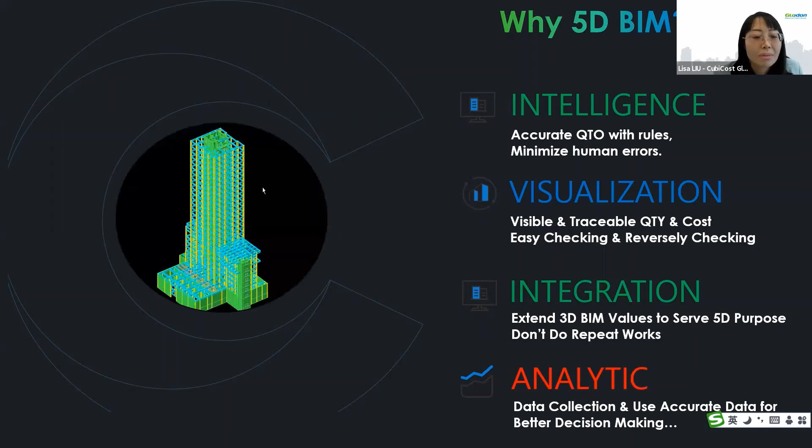Okay, as we move forward, every one of us has been affected by COVID. In fact, Singapore isn't getting better, we are really hoping things will improve.

Eventually, Singapore is going to stay resilient because COVID has affected every industry.

I have these slides showing you all a new definition, or maybe it shouldn't be called new, by Mr. Eugene Shah. His team, and some team with Sembawang Jurong, is also using CubiCost. He shared about construction overcoming virus through digital solutions.

Back 3 years ago, in March 2019, he also shared his point of view at our live event - that was really before COVID.

Well, for myself, I actually understood, or I feel so much that we are lacking connections, human connections with many of you - clients, partners. We can't see each other, and sometimes communication gets tougher.

Well, we're having a very short topic of the Ds. I believe many of you have seen this over the internet, if you use LinkedIn. So from 3D to 5D, that's what we're mentioning today. I will just highlight the 5D sector.

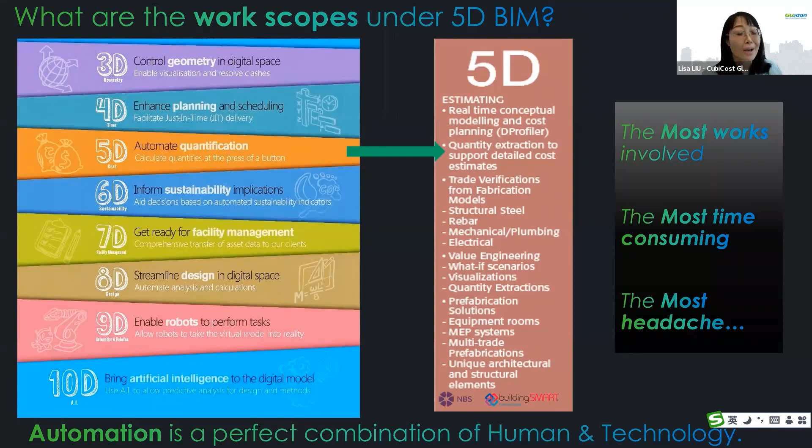I can't read all of them, and I was like, oh, being a QS is really not easy. Just this morning, I listened to one of the books mentioning automation, which inspired me on the definition of automated works. People might think there's a software, a tool, a solution where I throw my drawing inside and get everything out. In the real world, that's not possible. So what automation is, is a perfect combination of human and technology and tools. Our hands will be using the tools, and how best we use the tool makes the difference between us and a traditional QS who must still stay in the old school way.

I did also extract a sample contract requirement of LTA's on 5D. I highlighted some in red boxes. You can see you have to do the extraction of quantity for progress claims, and it has to be accurate with an efficient progress claim process. LTA also requires BIM training, and which solution or software they use, they normally leave that for the main contractor to decide. So I did also summarize the contract requirements.

Number one is accurate representation and cost model. With Revit importing and direct integration into CubiCost with SMM2, you can achieve that.

And number three, as for BIM training and hands-on support, we have very detailed online basic training. We also have hand-holding support, whether face-to-face or online, which is very easy nowadays.

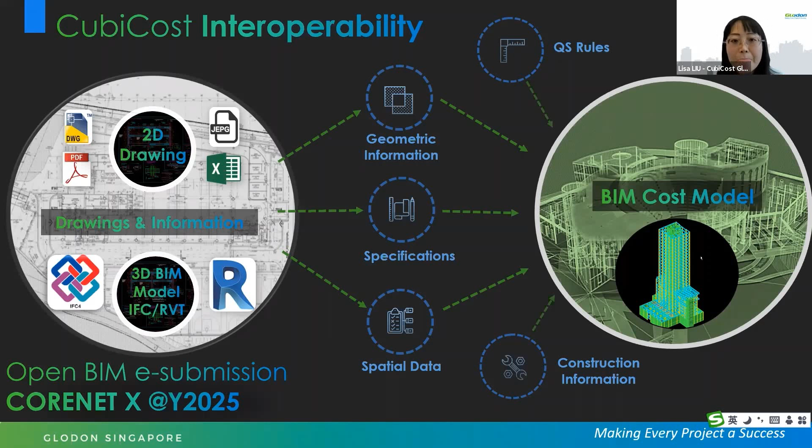There's an open BIM submission by IFC. CubiCost is also taking care of that. The built-in calculation rules are actually having so many options in CubiCost.

If we come into Singapore, we are talking about SMM2 and CP97, and we have Eurocodes in the rebar. We have Continental Steelbook for steel structuring dimensions and data built into the software. If we actually have the TAS to install, you will come into this window to choose the calculation rules you want to install.

So for Singapore, we go for CP97 and SMM2. For Malaysia, Indonesia, Australia, and many other places, we also have the rules written into the CubiCost system.

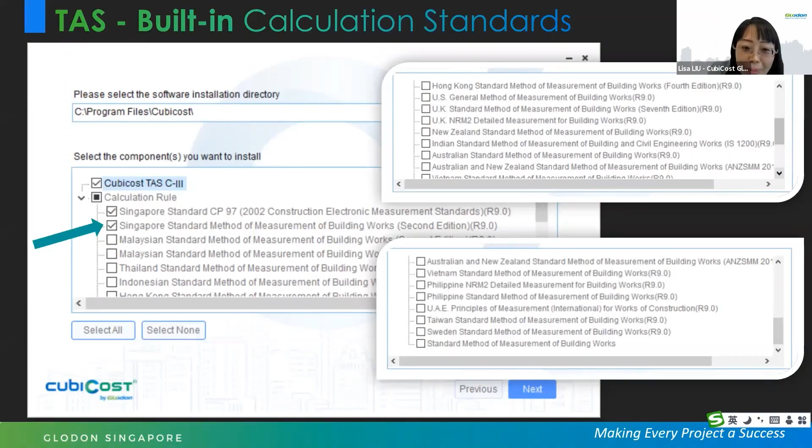So with that, later on, you will be able to see a TAS overview. You can get concrete quantity, concrete volume. Formwork is actually separated into overheight, side formwork, and bottom formwork. You'll be getting detailed finishes quantity.

That normally occupies 40% of the project cost. You will be able to come up with a rebar ratio by having your own technique study data. Of course, for CubiCost, we do not give any data for you to use. You guys are going to take that accuracy responsibility.

With SMM2 and CP97 for Singapore purpose, you will be able to see auto deductions. You will be able to enjoy a visualization check-in of 3D deductions and also calculation formulas. At the right side, I have some main items to share with you guys.

For Singapore, we do have a sector called precast, and we are able to do PPVC, just like Lego. We group, combine, copy and paste in CubiCost during tender stage. Of course, at project stage, again, we are talking about using a Revit model. And as for steel structure, we are able to do that.

That's actually the recent updates of CubiCost TAS 2021 version. As for finishes, we actually use a room concept.

Room concept, as we are talking about finishes, a recent finding with some projects we are supporting is: if the modeling team has modeled all the finishes in Revit, of course CubiCost will be able to read it. However, many of them do not model into that detail.

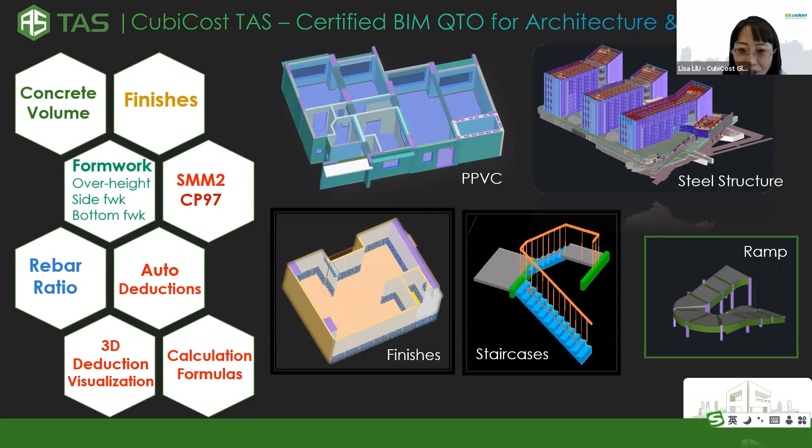Next, I will share with you all an overall understanding of rebar in the quantity takeoff. Again, I would use the example of Singapore. We used to have BS codes, and now we have Eurocodes - actually in 2015 there was a compulsory transform from BS to Eurocodes.

So in Eurocodes, we're talking about bond condition, good bond, poor bond. And for rebar, we set up tension, compression, anchorage, and lapping. All these, we have a table in TRB that you can look into. Every project, go according to general notes to set up precisely.

You are also able to calculate additional bar, trimmer bar, and use construction joints to come up with certain quantity that is partially done, and you enjoy auto deductions. There is a reference BBS that you guys can refer to.

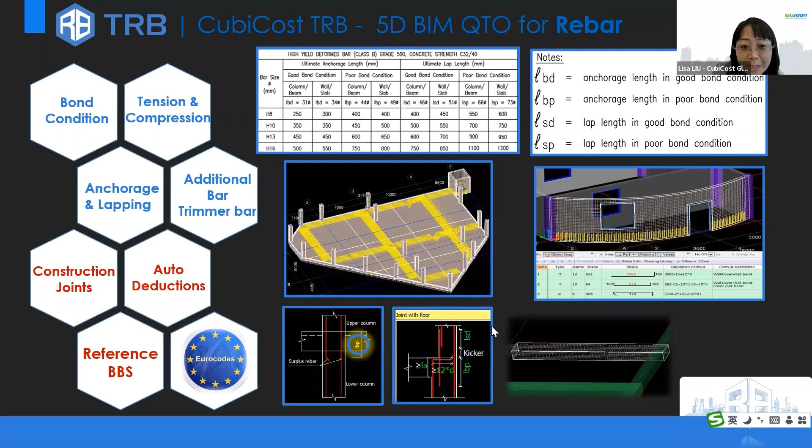However, in the real construction stage, the detailers and subcontractors doing the rebar will be different, to consider site installation situation. So that's about a general understanding about TRB.

For CubiCost itself, since these two solutions both have a structure, in fact we can actually communicate - you don't need to do double work. Let's see, we have the rebar structure model done with rebar detail quantity.

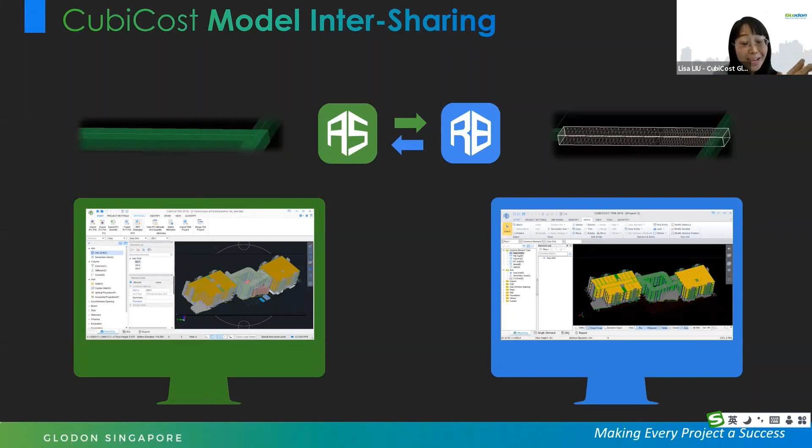We can actually bring it into TAS to generate concrete volume and all formwork automatically. Of course, if you proceed to do finishes, you will be getting the quantities of finishes. If we are talking about a project flow, you will actually flow a different way. I will share later.

When we have quantity from TAS and TRB, so we have all the building quantities, how are we going to manage the data? I believe many companies, Glodon included, a few years back our data was just Excel sheets, but when we want to see updated versions, how can we get it sorted and arranged and make use of it?

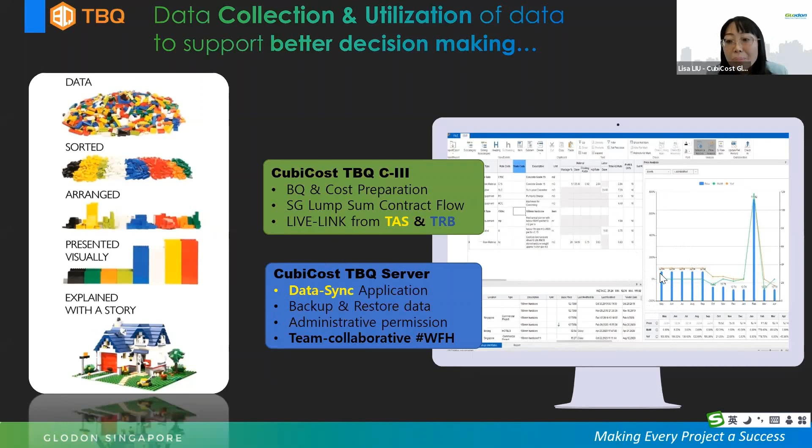Nowadays you might be able to use data to explain an interesting story. In TBQ, you can achieve that while linking the quantities done from TAS and TRB, and you'll even be able to see some chart and graph for cost analysis.

There are times, actually just yesterday somebody called me—I shared about this webinar. He's a BIM manager from a consulting role. He mentioned that normally the Revit model isn't ready for some projects' building sites, so can you still achieve 5D? We, CubiCost, are actually able to use drawings of 2D.

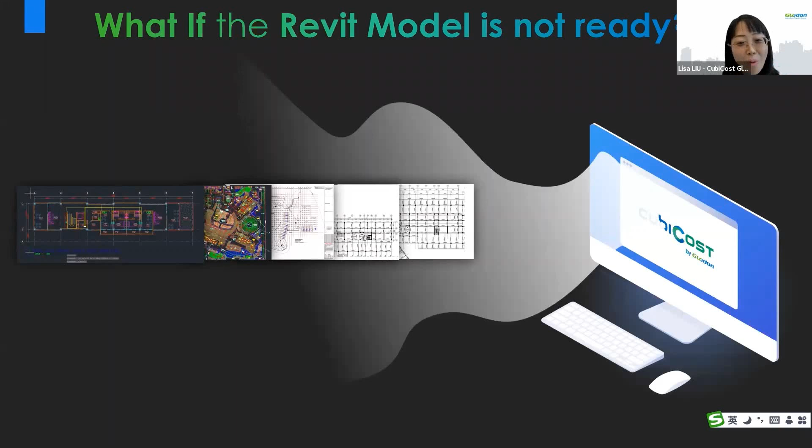You will have black and white drawings, maybe AutoCAD construction drawings. All of these can actually go into CubiCost TAS, and you'll be able to build up a 3D model like this. So how are we going to do that? Basically, just pick the line and convert it into entities, cost entities.

For that I may not be able to share a technical demo today. If you guys want to find out more, you can share with me later, and we can share some demo material or give you a live demo online, or simply a face-to-face meeting.

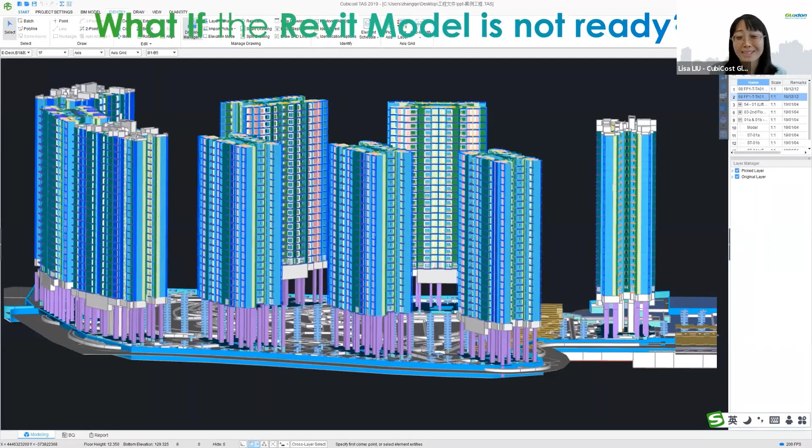So now we come into the topic of 5D BIM workflow. How does it run in CubiCost? Just give me a little while.

Okay, I just had a little bit of coffee and water, so now we start the important part of the 5D BIM workflow.

With this slide, you can understand we have proposed this workflow to certain organizations, main contractors, according to contract requirements. From the left side, we have the Revit model, whether MRT stations or building projects, it has to be Revit. We import the Revit model into TAS and proceed to TRB, getting rebar quantity. Of course QS need to do the work—you won't get 100% automatic, to be very honest with you all.

So from all the quantity linked to TBQ, we will be able to have the data to calculate work done percentage. I understand from LTA projects, maybe Jurong Region Line, QS will...

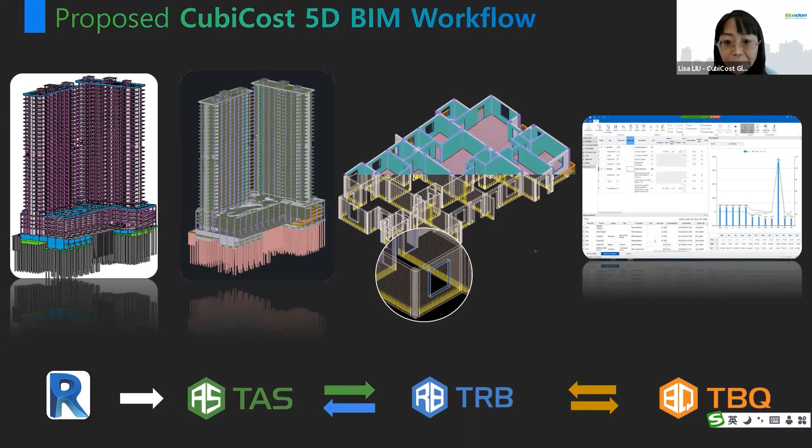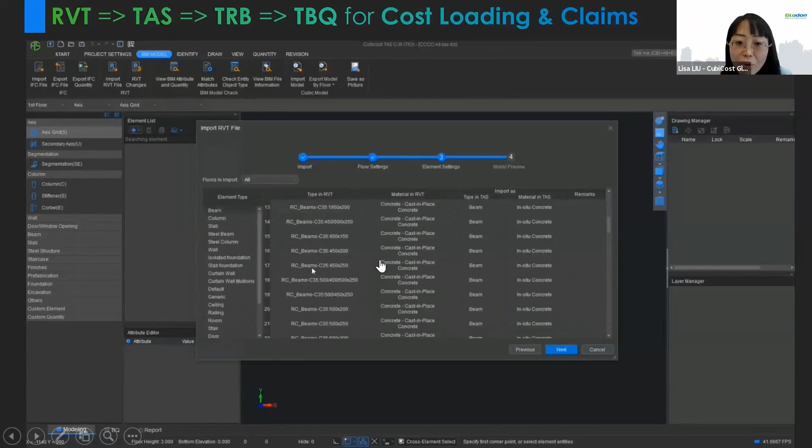I do have a video over here. It might be slightly long, but I still wish to run it to share with you all the main steps. Inside the TAS interface, we take the model and import it. We just need to give a reference floor—normally we use level 1, or for MRT stations the entrance level. We just match the attributes simply by three steps, and we import everything in.

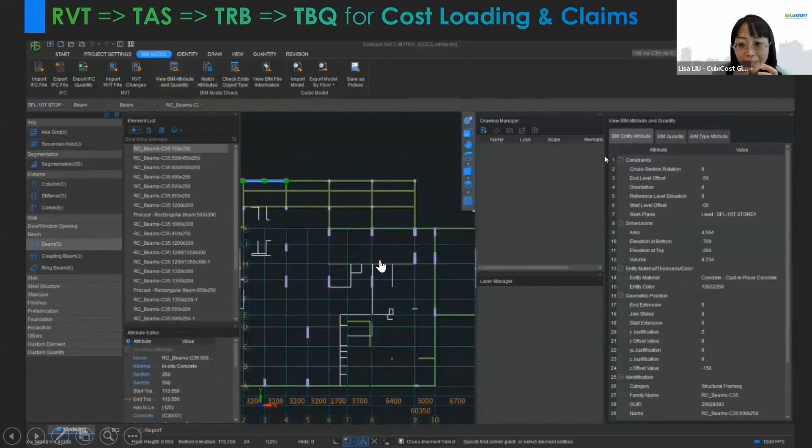With that process, if you proceed to calculate, you'll get the quantity of concrete, volume of formwork, as well as finishes quantities inside TAS. But again, what about rebar quantities? I've heard from projects that governmental projects now allow main contractors to claim rebar fluctuation costs, so you have to have very detailed quantity calculated and able to present.

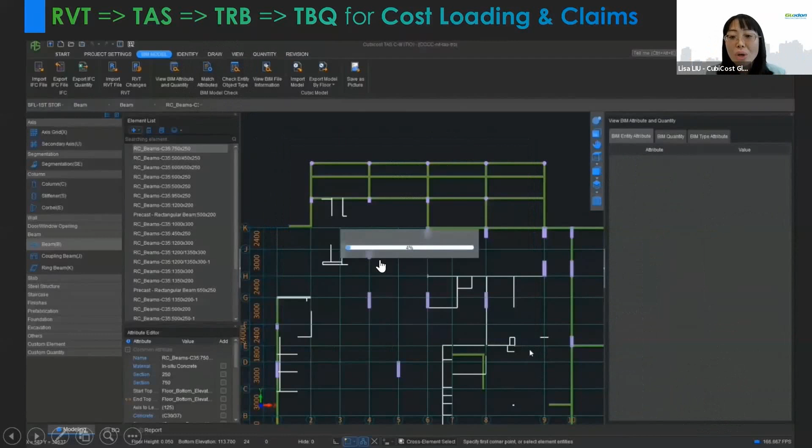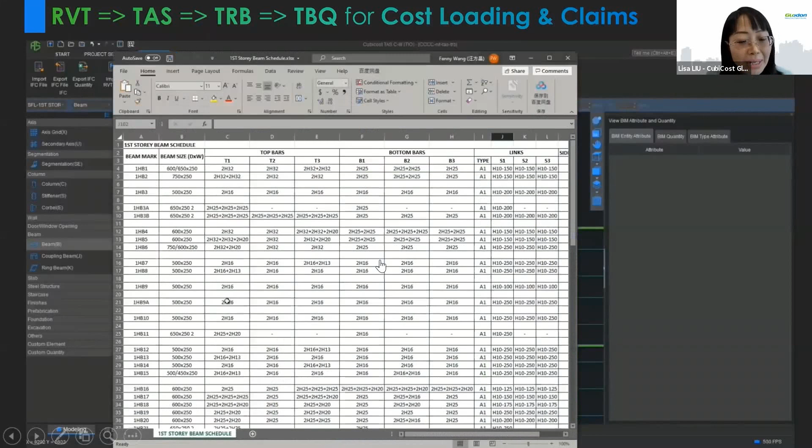Over here we are using a Revit-produced beam schedule as an example. We match the attribute by using the beam marking name. You can see if we did the sorting, the beam marking name and the element list will be the same. So what do we do next?

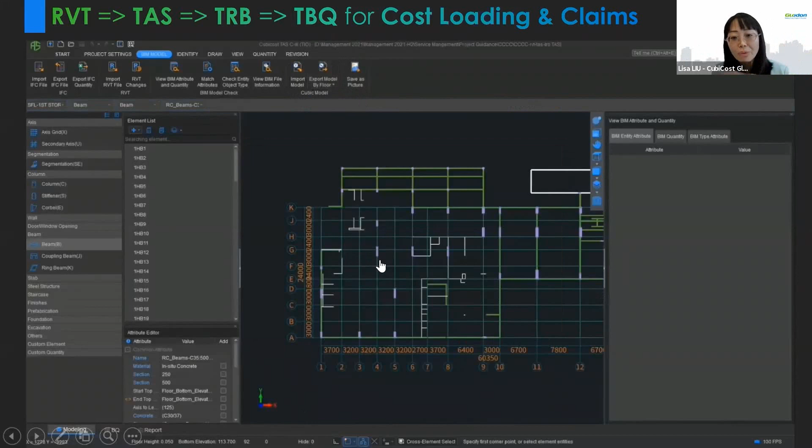We will be exporting this model as a CubiCost file. We only export this level 1 for testing purposes. Then we are going to import it into TRB so that the reuse of model QS does not need to do repeat work. So now we come to the white interface with the blue logo, TRB. We import that model, but this time we don't import Revit.

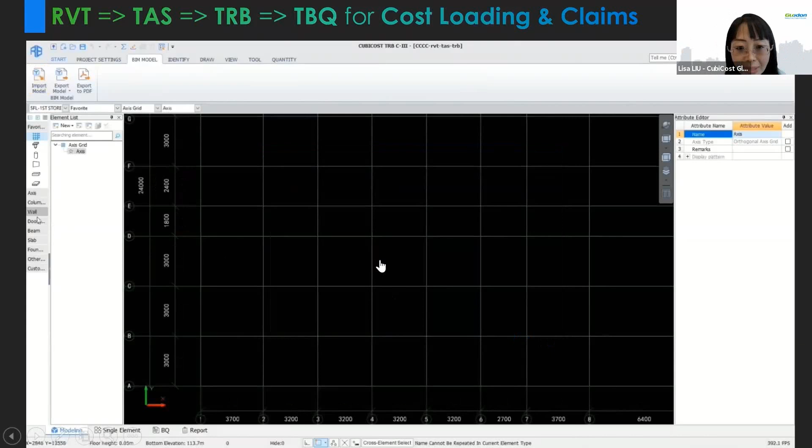And then we will be able to have the model in place. What are we going to do? We bring the general notes with the rebar details and with the beam schedules, and we're going to do something. Let me hold and let you guys see.

So if we proceed to just see one of the beam, do you get rebar quantity? You don't, because we didn't key in the data. But we also don't want to let QS do so many manual keying works. That's really tedious, and in many situations you guys don't have the quiet time like us.

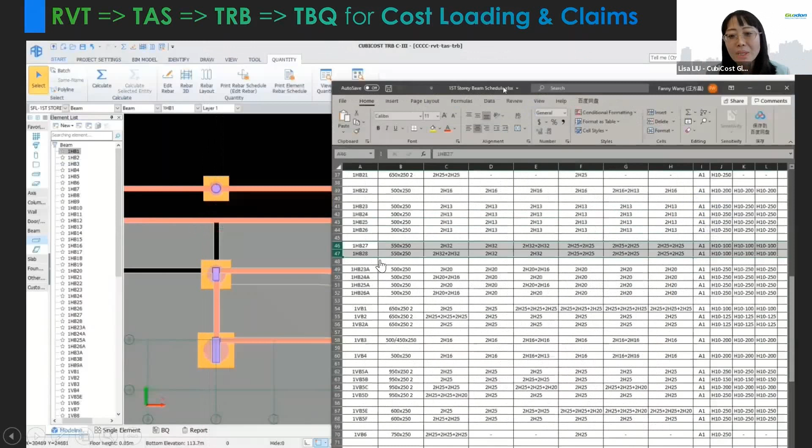We are looking in a small meeting room today, so we will be reusing the beam schedule. We take example 1HB27, 1HB28. We're going to do importing of Revit-produced beam schedule. You can see the format is actually Excel.

Of course, at this stage, you are able to bring in a PDF. I'm just adding on, since later on maybe somebody will have a question. That is the part where humans need to work together with machines or technology tools.

You've got to do nominating. You've got to tell the software what this column of data is, so that the software is able to synchronize and match it. That is the thing that QS needs to do.

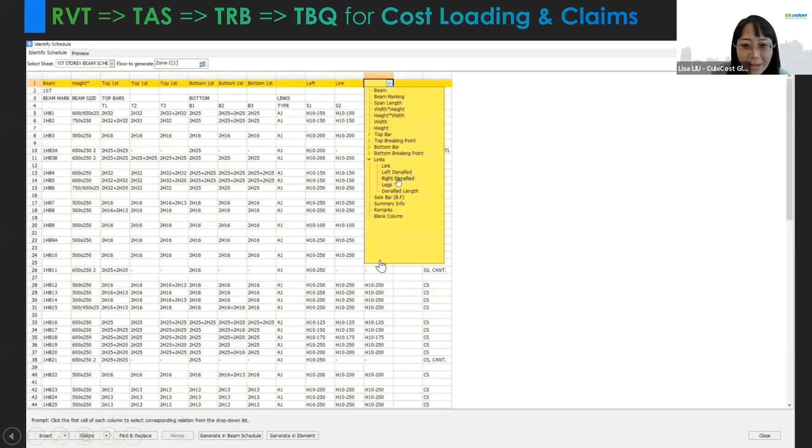Is that difficult to do? I don't think so. Just take the table side by side and do maybe one minute of quiet work, putting away your phone and switching to silent mode, and then you get the nomination of data done for the beam schedule over here.

If you do a checking, you can see the list: continuous beam, single beam. It is exactly the same. Important button: we will be syncing beam information.

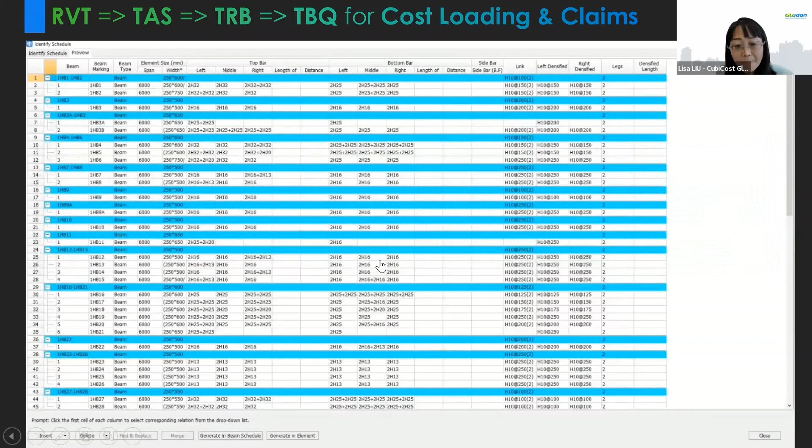Into the entity. So in CubiCost, the entity is called the cost model, so a model with quantity data for QS. After we sync successfully, we actually come back to see the rebar again.

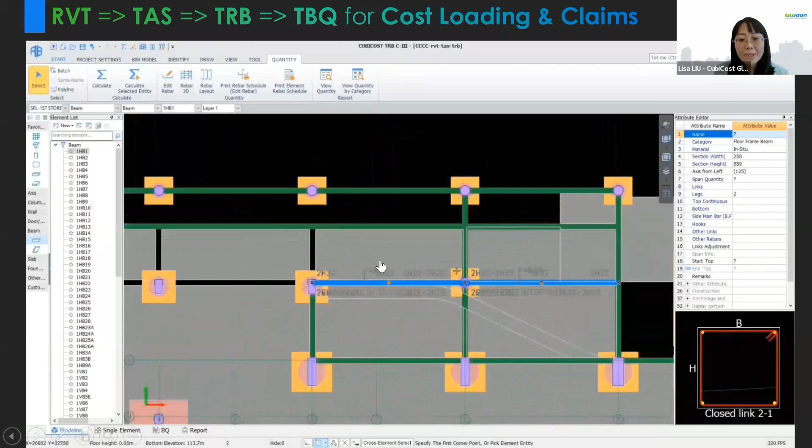Now we do a calculation. I think you guys already see some of the data indicated over there. Let's view the rebar in 3D. So you already see some of the rebar 3D inside the column, inside the beam, and you might be asking, is that actually a continuous beam?

So in TRB we can just do some simple merging. Now, recalculate. You'll be getting the rebar quantity with a 3D view, with lapping to connect two of the beams.

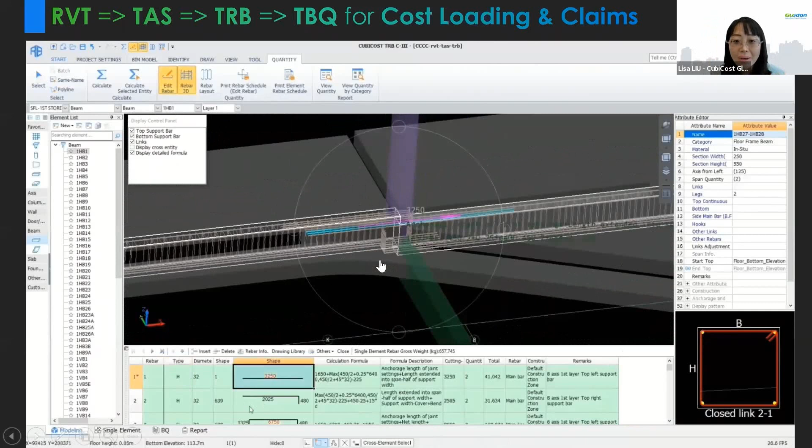Well, if you talk about vertical elements like columns, it will be a similar way. Walls will also be a similar way as well.

I can see that our time comes to 3:30. I actually have a slightly longer video over here, so let me jump a little bit ahead to share with you all a flow by using just one slide. When I share the videos with you all later, I will share the full version.

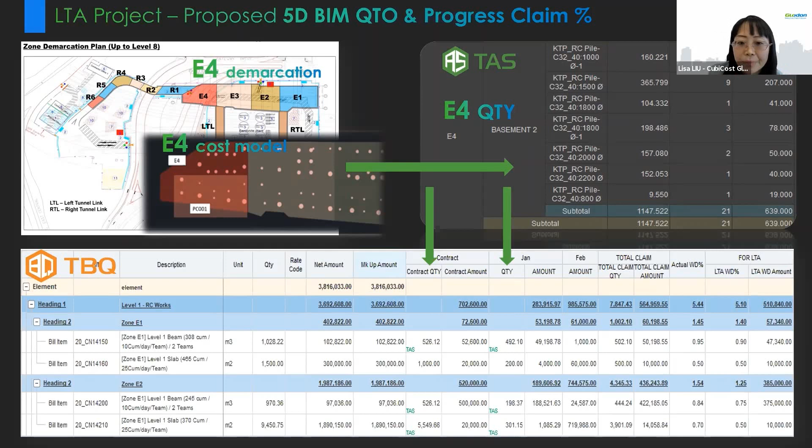Yeah, my video is slightly longer, including many more things, but as for time constraints, I don't wish to play everything over here. I was mentioning a tailored feature in TAS we call the construction module. What is that for project QS, for maybe BIM managers and BIM modelers, to look into the overall management of BIM workflows.

With the model, how can we extend the 3D value to benefit project QS for progress claim submissions? We actually designed this function pretty recently, just this year. We call it segmentation. Under segmentation, you are able to do subcontracting, progress claim, and you can even customize some special things that QS need to do.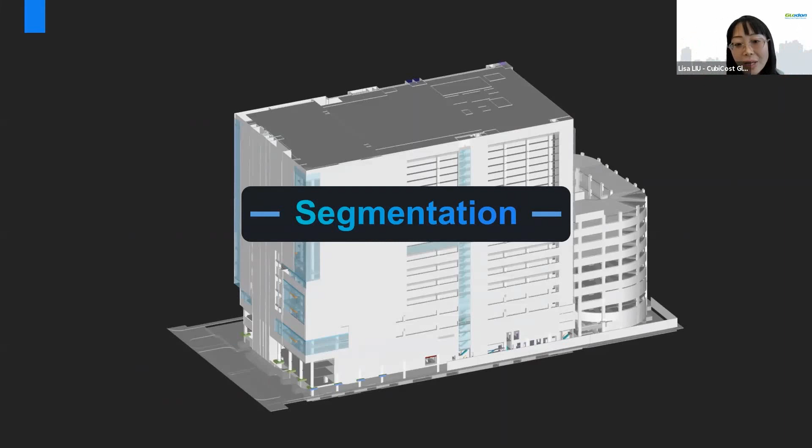So you can see with the model, we actually do the importing, we get a quantity, but this time we're wanting to do some progress claim. We do the segmenting, segregate. Once we just draw a box to segregate and put claim number 1, automatically we are getting column, beam, wall, slab on the volume, and formworks.

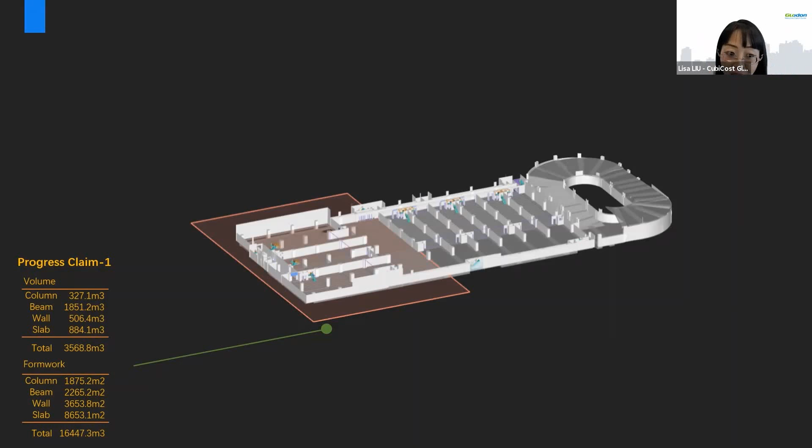Of course once we finish this, we also got the figure. So if we proceed to do number 2, we get the same. You might ask, in between that line, how do you want to choose? Actually, you can flexibly tick and untick what are the elements that is under claim number 1, what are the elements that will be claim number 2 for next month.

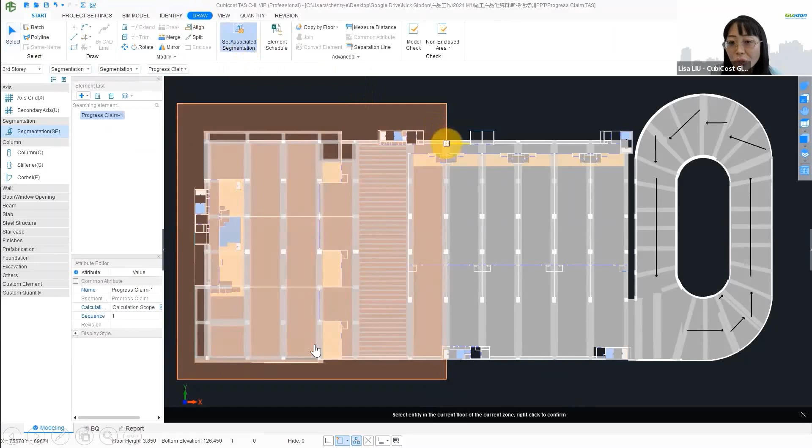So as for sharing with you all a short video on how the segmentation works, you can pick what are the elements that you want to claim. That is actually for LTA project, which will go according to activity ID and displayed, distributed into the cost log

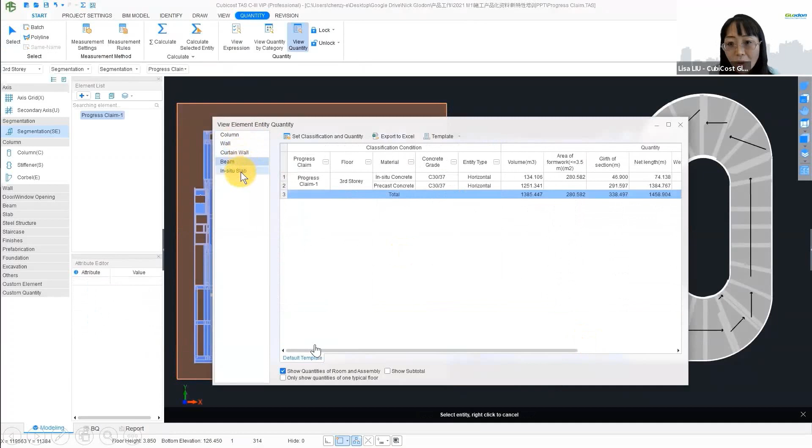according to BLP and demarcation plan. You will be able to produce and calculate work done percentage. Then you understand for the claim, how are you going to claim for January, February, or nowadays, next month, October. And you will be able to have an overall view for the whole project.

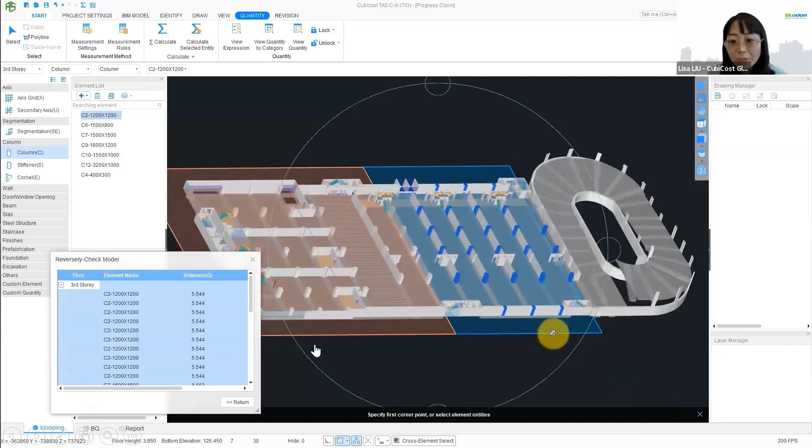I wish to share a little bit, maybe QSs over here already have certain understanding. We noticed that LTA actually has a fixed work done percentage given to main contractors. You have to achieve, let's say 25%. If you achieve 24%, you can't get 25.

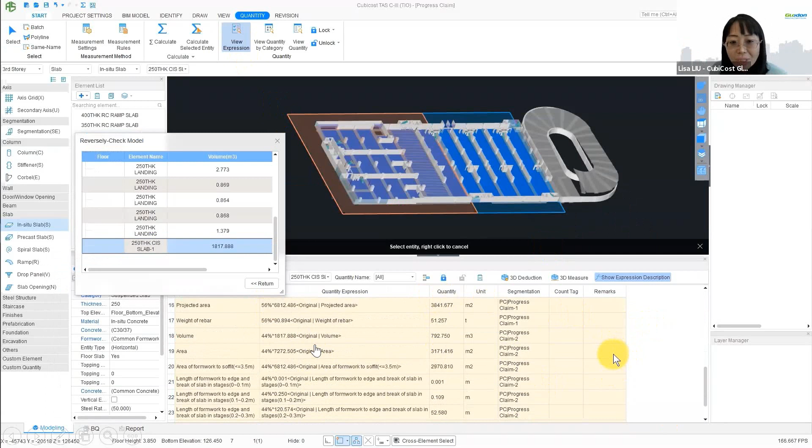And the next is actually 50%. If you achieve 40%, you can't claim 40%. You're going to go down to 25%. So for that, TBQ also have some ways to take on it, whereby maybe HDB and maybe JTC and some other developers, clients, they will be allowing main contractors to claim based on actual work done.

So for that, you guys have seen the short steps of how to do the segmentation. Next, we are proceeding to revisions. Well, for revisions, I personally had some experience measuring formworks.

I could use the rulers and measure some data, and my manager asked me to do that. That was actually 5-6 years ago, before joining Glodon. Then I started to doubt. I told my manager, hey, I don't feel comfortable. I don't feel confident for that quantity I measured.

Please use it carefully. It's really very hard to spot the changes with bare eyes, and you got to take off the quantity. That would be another trouble. And you got to think, have I considered all the changes? Did I miss out anything? How do I actually compare them easily, and report to my managers and bosses? How do I even present and get verified and talk about it easily, digitally, efficiently? Are you really only having a choice to go manual? Maybe not.

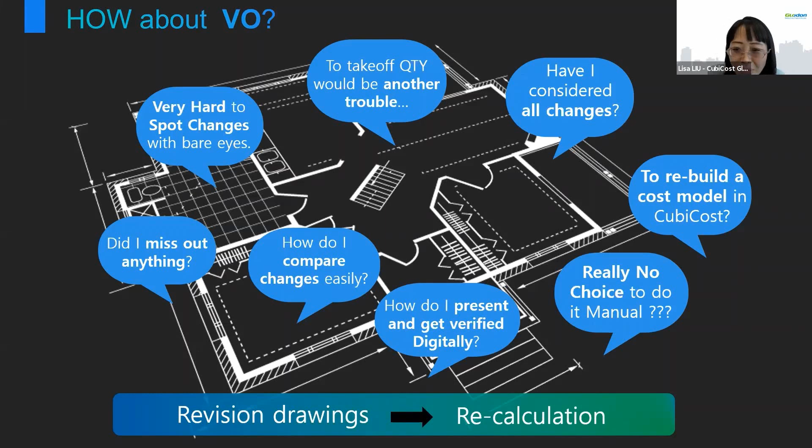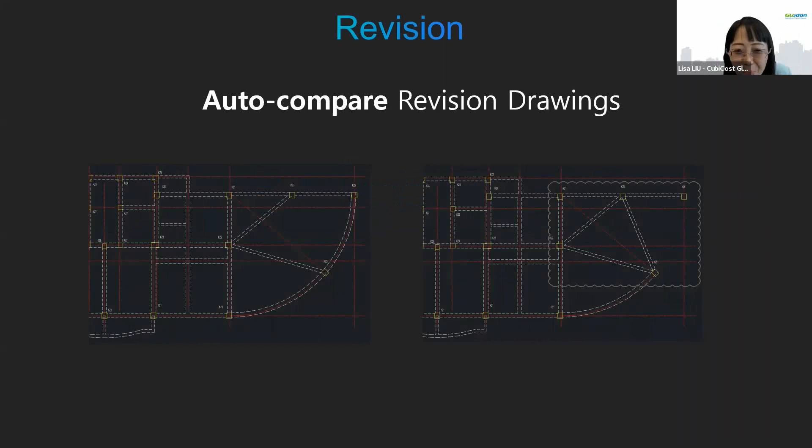Okay, revisions, how do we do that? With 2 of the drawings, TAS has a way to help you auto-compare revision drawings. And then you can easily edit the modeling, or you can just delete off and remodel according to the drawings. For that small portion of modeling, it won't take you so much time.

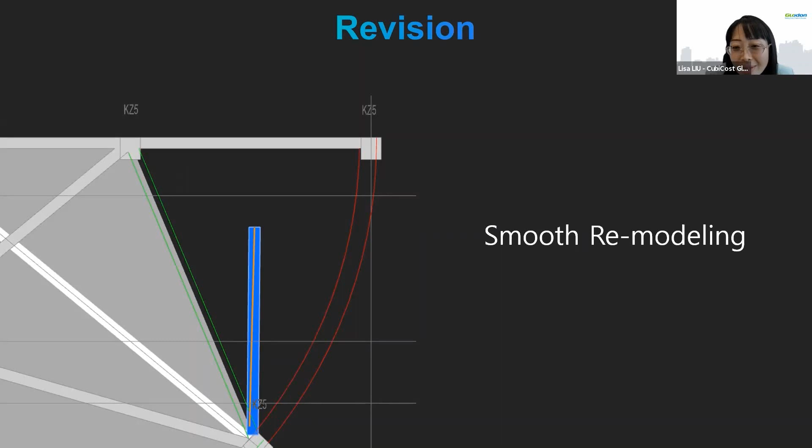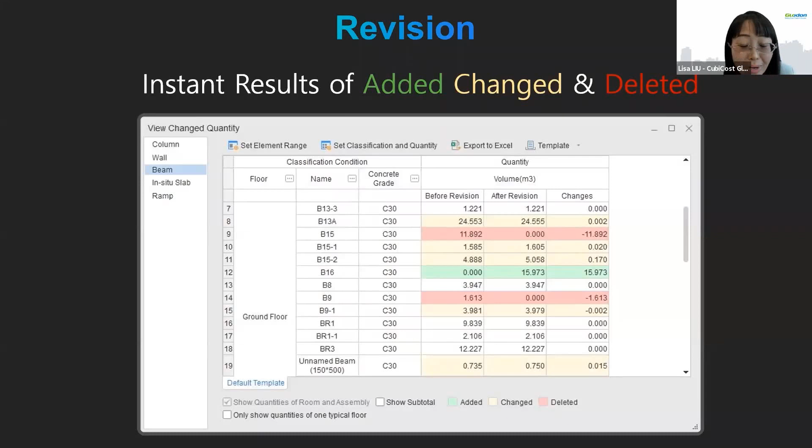If you're having rapid changes, you are able to manage by using a function called Revit changes as well. And then you will be able to get instant results on added quantity, change quantity, and deleted quantity, and you have it for before and after. Is that what you guys will need for Project QSs?

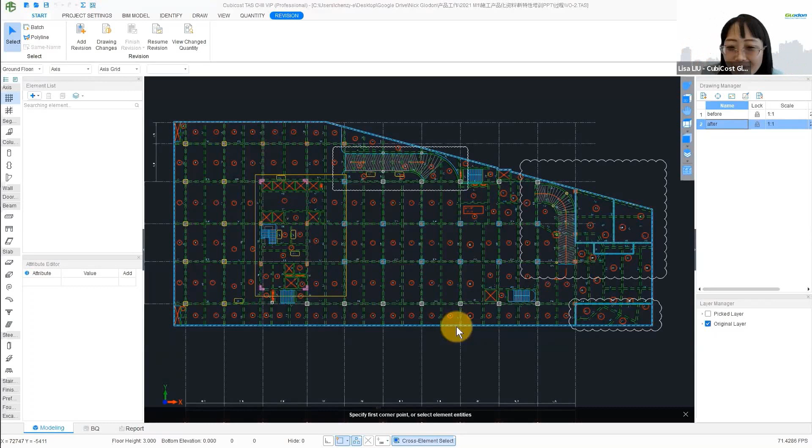We do have some videos. Maybe I'll skip the video part as I'm going to share the recording as well, and probably slides if there's anything we need to clarify on the information sharing. So it's actually easy to do the steps to match or compare drawings to get quantity of before and after.

As for the TAS construction module, the main functions are segmentation and revision. We are able to import Revit native files with 100% information and manage Revit changes.

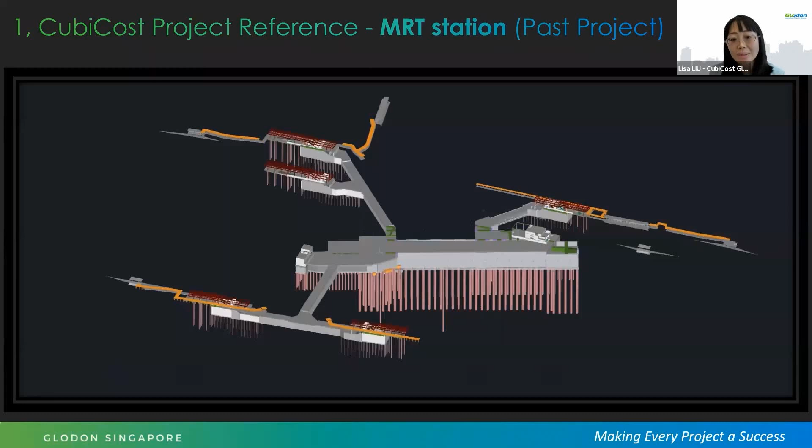We come to understand a few project cases. Case number one, we use one of the MRT stations. So in the Revit model, you have something like this, and we simply just import it.

You get overall quantity, but if you want to get the progress claim quantity with even some color code indication for easy presenting and verification, you will be able to achieve progress claim reports like on the right side. I have claim number one, under which subcontractor, under which floor, the element names, volume, and the area of formworks. So that's one particular example for the MRT station.

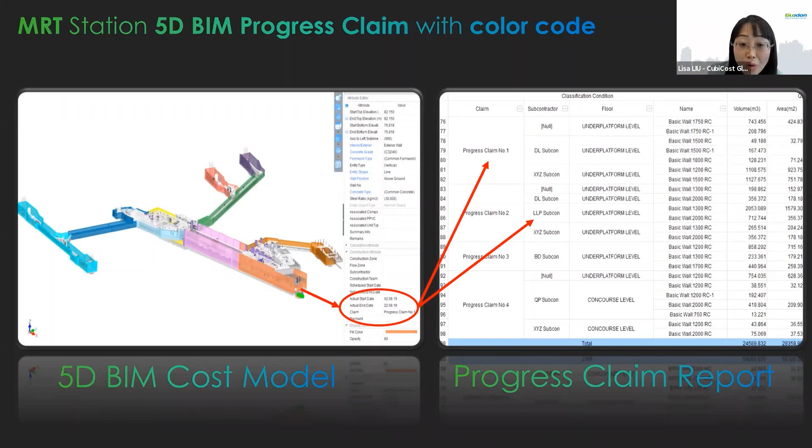A lot of you guys might come from our clients' companies whereby main projects are actually housing or commercial projects. So we use one of the building projects to show you all. That will be actually the 5D BIM progressive BIM cost model, and you can submit it for easy valuation and assessment.

And the benefits, very simple. It's actually a simplified way of checking, go according to BIM ID for quantity and cost. Just now you guys have also seen I showed checking and reversely checking. And you will be able to generate work done percentage according to quantity details for an in-depth review.

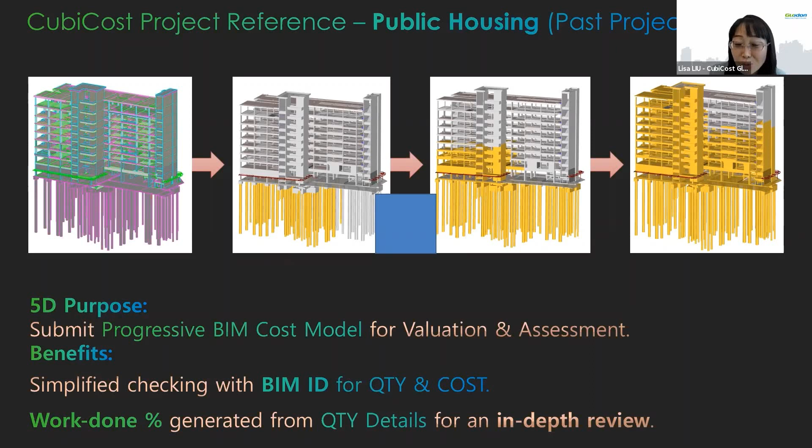Of course, I do hear from not only main contractor and client side, 'hey Lisa, our contract is lump sum, if our project is 1 million, I won't pay over 1 million.' Yes, yes, yes. But every claim you still check very carefully, right? You don't want your budget to burst, or you want better control of project costs and better monitoring. You can do that, and you don't need to worry that you need to do so much extra work to achieve that. By solution, you already automatically have it. Why not?

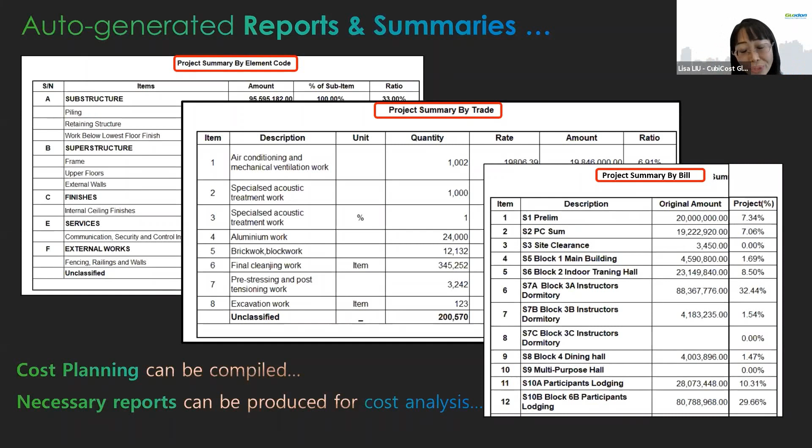Well, yes, CubiCost TBQ with the data linked, you will be able to achieve some automatic reports like project summary by element codes, by trade codes. For building, you guys will definitely use that very often, am I right? And we have project summary by bill as well. So all these are automatic if you have done your fundamental works.

We come to the practical implementation. Let me drink some water, sorry.

I actually remember some of the stories when after joining Glodon in 2015, September 23rd. In 2016, I went to many of the M&E contractors. Some of them are big, some of them are doing building and M&E as well. And one day I gave a phone call to Mr. Ivan, I just won't mention his name.

And he actually talked to me like this: 'Lisa, your job is tough.' I said, yes, my job isn't so easy. And he added again, your job is not sales, you are doing an educational job. At that time, I was like, what? Okay. But over the years, I feel it. And I understood from many users, managers, and bosses, implementation - how do we actually do a practical implementation? That is really an educational job, I would say.